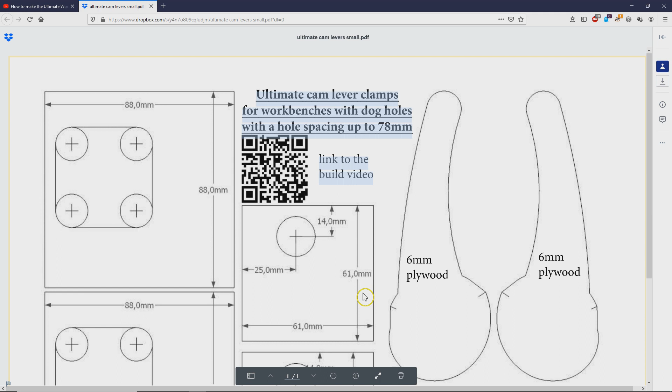I think it affects how low profile the blocks are, so at some point maybe I'll remake them with thinner plywood. But with what's going on in the world today, I'm not going to the hardware store.

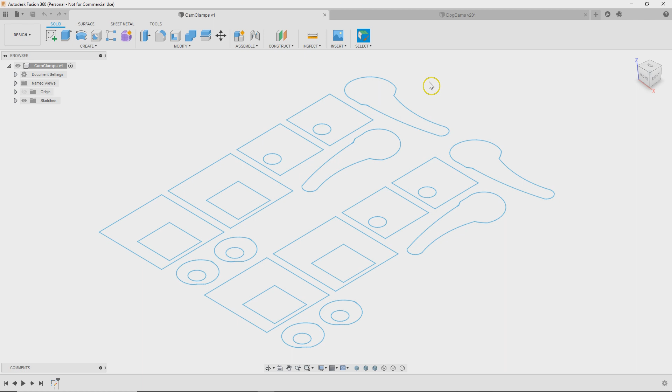So I took this DXF drawing and brought it into Fusion 360. This is basically the DXF drawing, and I imported it into my own sketch. I kept everything pretty much the same except the diameter of these circles.

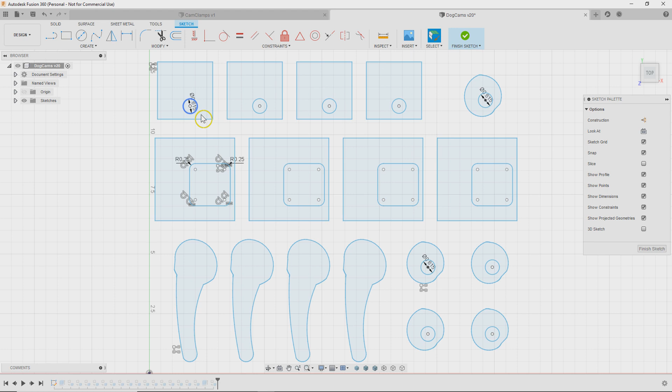Marius is using metric copper pipe, and I'm in North America, so I just changed it to the North American standard pipe for half-inch pipe. I kept everything else the same, and then I extruded these parts up 12mm. So that's basically what this is.

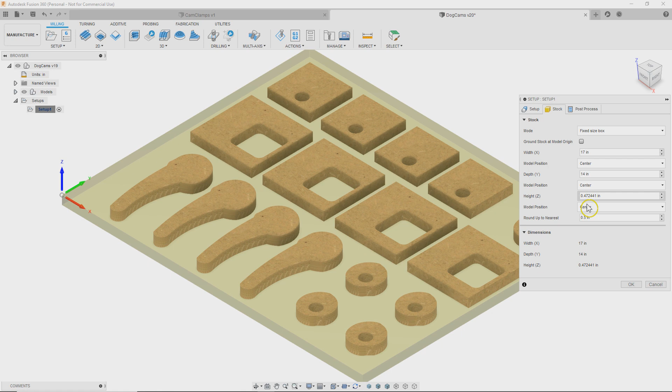I was basically about to go back into CAM, which is the manufacturer side where you make tool paths. I've done a little setup where I set up this piece of stock, the light green block. It's 17 by 14 inches wide, and this Z is 12mm converted into inches. I have a big sheet of this. I don't know if I'll cut it beforehand, but nevertheless, this is the setup for the toolpath.

So I was basically about to add the 2D contour to cut things out. Let's do that. I'm going to select the levers, and then it asks you to select a tool.

I'm going to select a tool, and this is your tool management window. I've created a library of the various bits I own and put them in here. The one we're using for this is a 1/4 inch spiral down cut, and in this dialog you basically enter in all the data for your particular bit.

You enter the dimensions, whether it's a flat end mill, how many flutes it has, things like that. And importantly, the speeds and feeds. My bit didn't come well documented, so I went out to Amana Tool and looked up one of their bits that's very similar.

They have a 2-flute solid carbide spiral plunge bit, and mine's a 1/4 inch too, so I'm just going to borrow their specs and hope that it's good enough. We're going to be running at 18,000 RPM, and at a 1/4 inch, we're anywhere between 180 and 250 inches per minute.

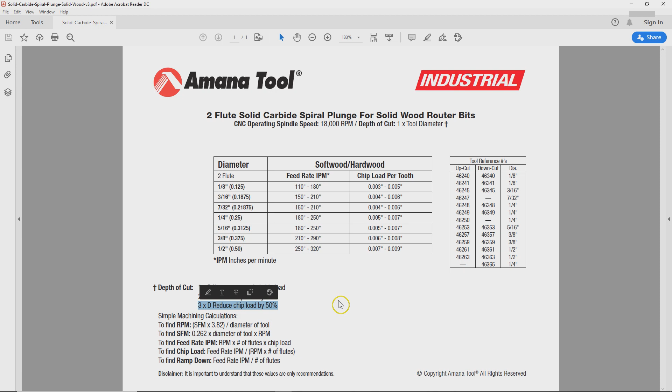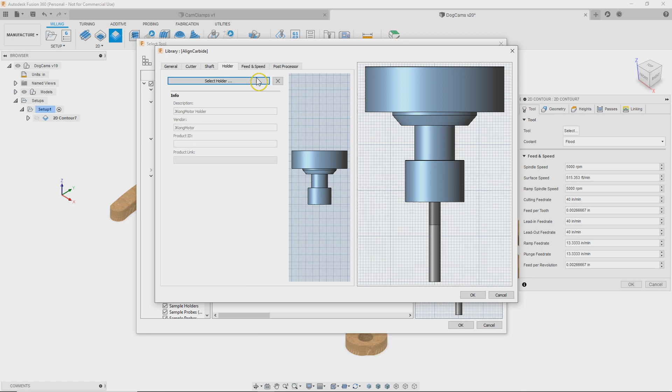Back to Fusion here, one of the other things I've done is model this J-Kong motor because that's my spindle, so I modeled the holder to match it. In Fusion, you can simulate a tool path, which is useful so you know if your holder ever collides with a piece of stock or a clamp or anything like that. I've modeled that here, so that's what I've specified the holder to be. That's kind of useful.

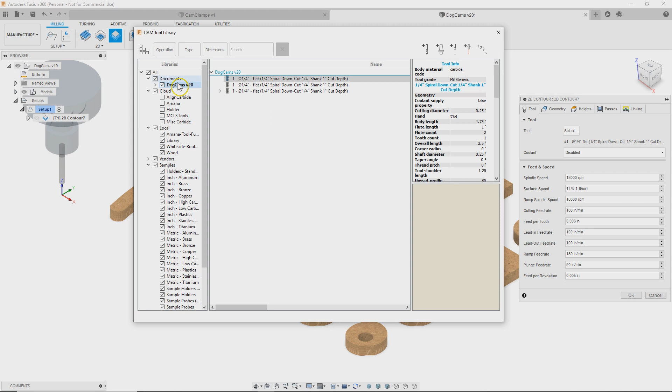So basically we'll be taking that, and just so you know, the speeds and feeds populated here come from the tool you just selected. But if you go to the tool library manage, what's actually happened is the tool has been copied from your library into the document itself. So now if you modify these, the bottom line is it's good to know you have a copy. I can modify the speeds and feeds or certain aspects of the cutter just in this document, or I can do it globally.

So moving on, we now have our contours selected. I need to go to passes, and basically what I want is multiple depths, because I don't want to cut this all at once.

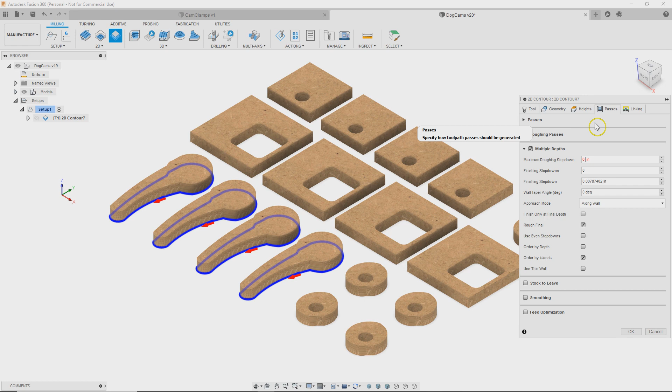I want to step down a little bit, and I'm going to say I'm looking for about 1/10 of an inch. We'll see what that gives us. So I'm going to click OK, and then it calculates the path.

You can see it actually decided to start the cutting on this third lever, which is fine, I guess I don't care. But more importantly, we now have four step downs.

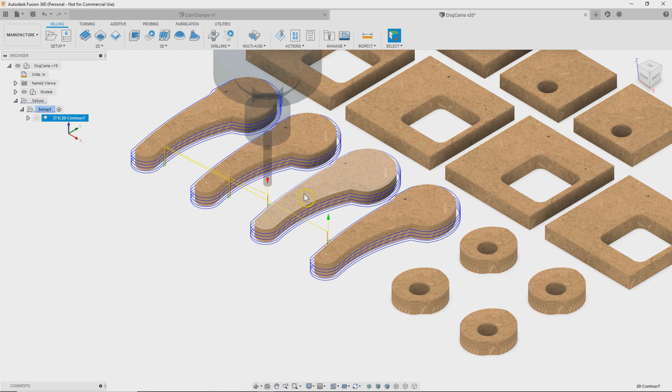What I also need, which I'll go back in to adjust, is some tabs. I don't want the bit to cut this piece completely free of the stock, because it's going to rattle around in there and probably get damaged or tossed. So I want some tabs.

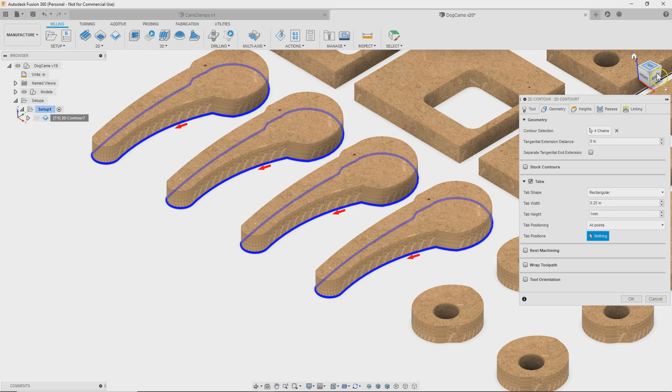So I want to select the tabs by points, and I'm going to say 1 millimeter tab height. Then I will just select some points here. Probably going to overdo it a little bit since I don't really know how critical this is. So, all right, that's pretty much that.

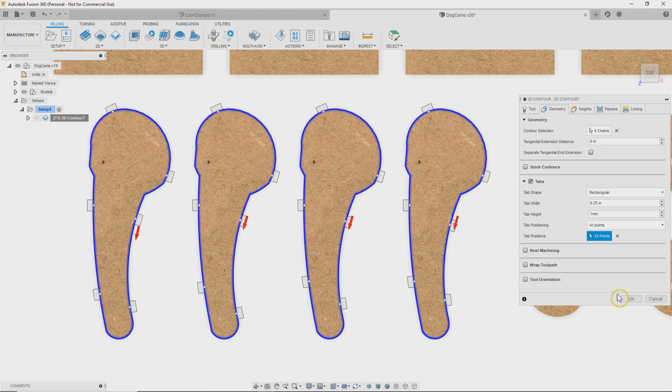So, number of tabs. Now let's see what it updates that path to be. So good, you can see that it's leaving these little tabs basically.

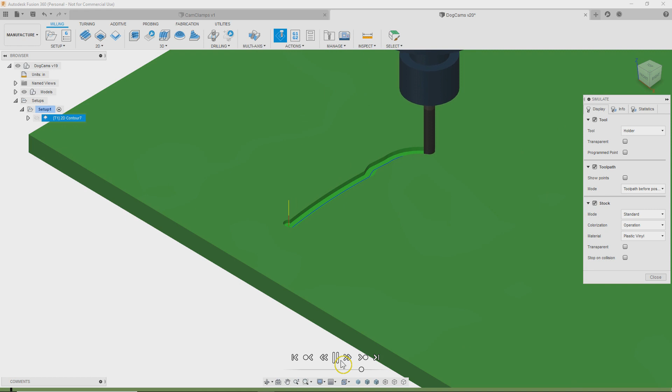So now if we animate or simulate this, you can either do it with the stock on or off. Let's do it with it on, and then you can see the path it's going to take. It seems to leave a little notch there to go down, which is good.

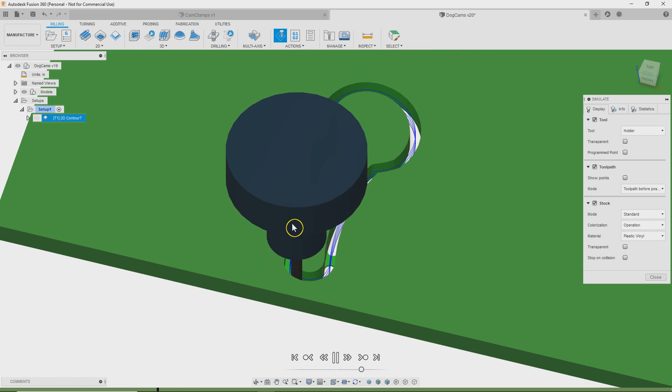I probably could be a lot more aggressive with this cut, but we'll see how this goes. It's cool, and those are the tabs that are left. So that looks pretty good to me. Let's zoom out, it'll go faster.

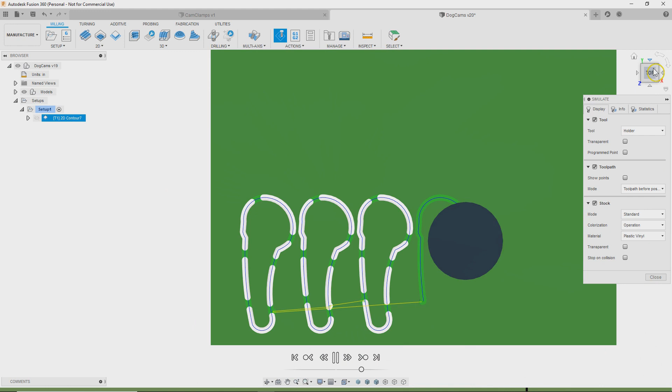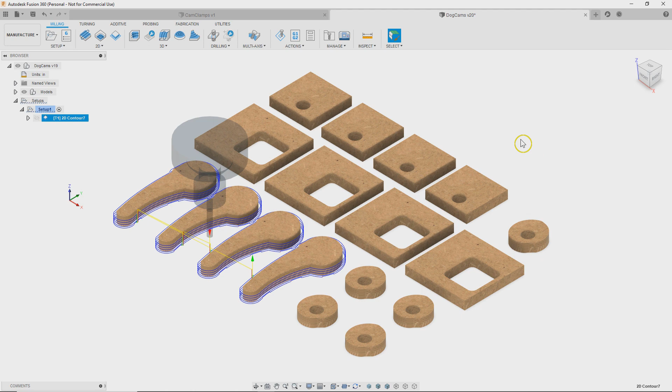All right, okay, so I'm pretty happy with that. I won't bore you with the rest of it, but basically I'm going to go make paths for everything else on here, and then I guess we'll go out to the machine and probably cut air for a good long time until we're satisfied, and then we'll let it loose and do the real cutting.

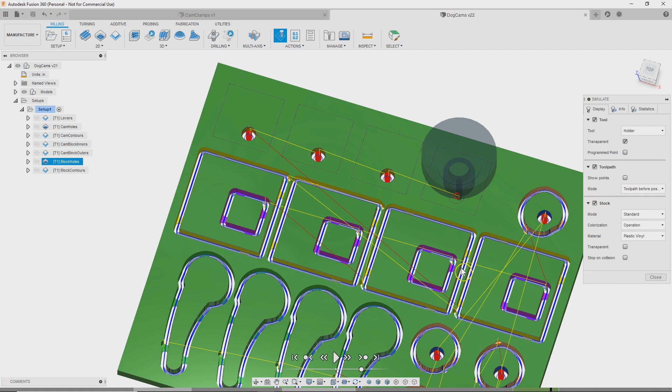If I cut the perimeter first, then when I went to cut the hole, I might tear the larger piece free from its tabs, and so I wanted to cut these inners first. So that's just something I did. I'm kind of happy with the simulation, so I think I'm gonna basically

turn these into G-code files and take them out to the machine. So here's the bit we'll be using today. It's a 1/2 inch solid carbide spiral bit, down cut. We'll see how it goes.

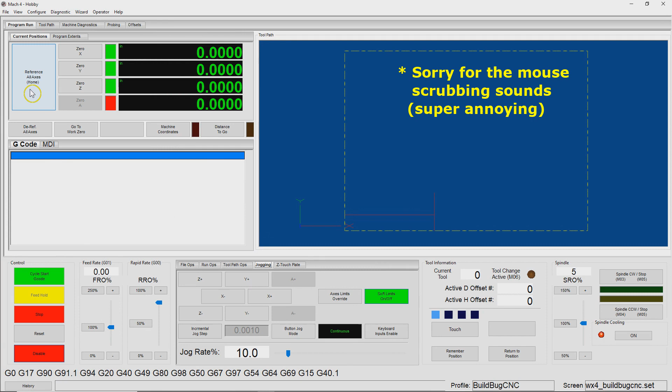When I come into Mach 4 on the machine, the first thing I do is I enable the machine, and then I reference all axes home. And I'm sort of hovering above my e-stop button just in case the machine doesn't stop.

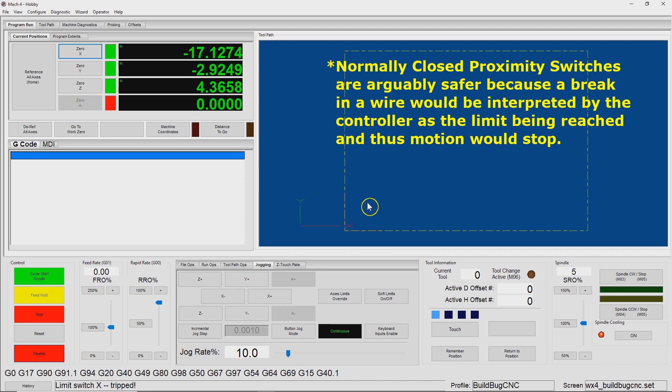You kind of have to know the limitations of your machine. In my particular case, my proximity sensors are my limit switches, and they're also normally open switches, so it's slightly less safe. I could theoretically have a bad connection in there and not know about it, and then when I approach my limit switches, they don't fire, and thus my machine won't stop.

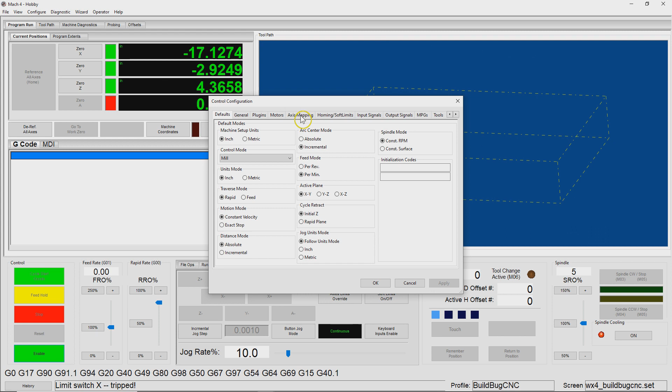So the good thing is that I've set up soft limits, and as you can see maybe here on the screen, this dotted line box is essentially my soft limits of my machine.

So if I disable the machine and go to configure control, in the homing soft limits, I've set up basically some soft limits. I've enabled them by the check mark, and then you can see there's some figures in there that essentially set up this bounding box. And so that will now limit my machine.

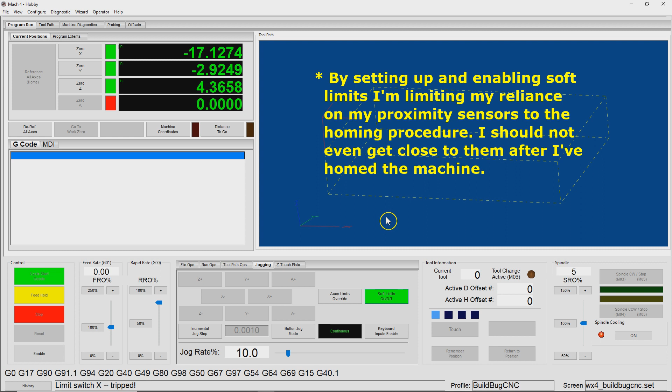So from this point forward, I will never even get close to my limit switches as long as I've enabled them. For example, here in the file ops or in the jogging, I have the soft limits on, and that will prevent me from ever approaching those limit switches. It's just an added layer of safety, and I've already encountered times where it saved me.

Anyway, so now that we see that, these are the work coordinates of the machine, and if we click on machine coordinates, we'll see since we just homed, we're at the homing location. So the machine coordinates are 0, 0, 0. And the work coordinates are somewhere else.

So anyway, now we're going to enable and jog back over to then use our touch plate to find the corner of this workpiece. So I'm just jogging down.

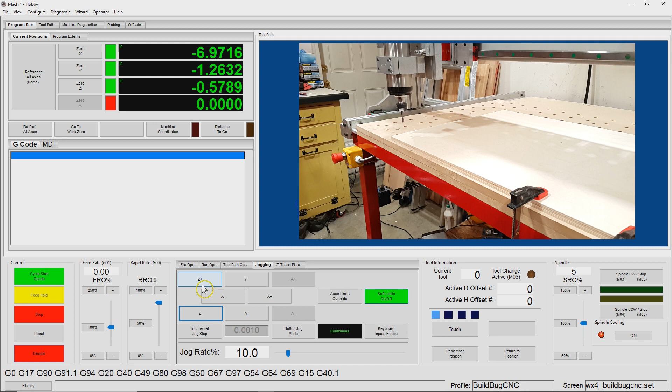Good enough. So one of the things I always do is test my touch plate to make sure that it's working. And so it's working. Now I'm going to put it in place here.

And then we are going to jog a little. And then we're going to find the corner of that workpiece, basically.

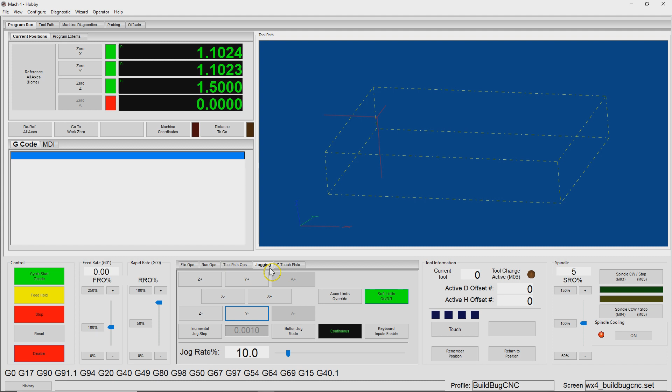All right, and so once I click OK, you'll see the work coordinates change from what they are now to what these are. And so that has essentially changed the work coordinates of the machine. So here are the machine coordinates and the work coordinates. And so it's basically your two reference points.

All right, and so now we know where the corner of that piece is. We don't need this anymore. The next thing we're going to do is to open the G-code file. And so these are the levers we just created.

And so what I'm going to do is come here to the feed rate. There's this feed rate section, which is G01, and then this is G00. So this controls how fast the machine is going to run when you cut and when you're not cutting. And so I'm going to drive these down to 0 so I can sort of cut air and control things really well.

And then I'm going to go to View, Fixture Offsets. And then for Z, I'm going to add 1 inch. And so this means that we're going to add this work shift so that every piece of G-code that comes in interpreted here, this instance is going to add 1 inch to it in the Z direction. And so that's going to basically let us cut air.

And so here you can see in the G-code that we come down, and then here we're turning on the spindle. And I'm going to quickly turn off the spindle so that we're just using this dial up over here so that we don't have to deal with that.

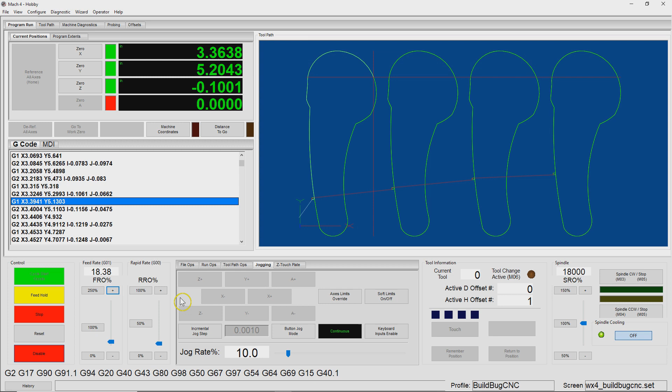And so over in this window, these red crosshairs are telling you where the bit is in the toolpath. Obviously you can hear it makes quite interesting sounds when it goes slow.

And so I'm feeling pretty confident about that, so I'm going to just pump this up a little bit more. Cool. And so we've come to the end of that feed rate, and now it wants to do a rapid. So I'm going to take this to 0 and then go up on the rapid.

Okay, and so it basically retracted again and then went down. So that was somewhat unexpected by me.

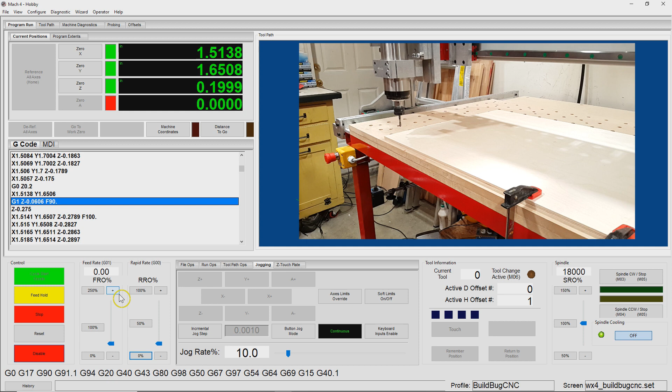Alright, so that feed is done. So let's do the rapid again. I'm pretty sure in the configuration of Fusion you could tell it not to do this retraction, so maybe that's for future.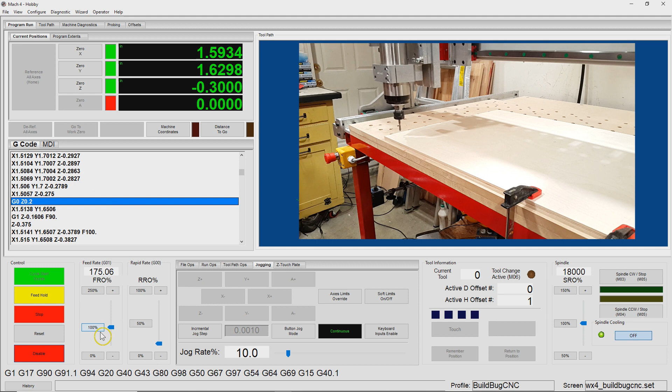So basically that's 100% speed right there, so that'll be interesting to see. So let's do one more round.

There you can see it's doing those tabs. Now it's moving on to the next one. You can see we're over in the second lever now.

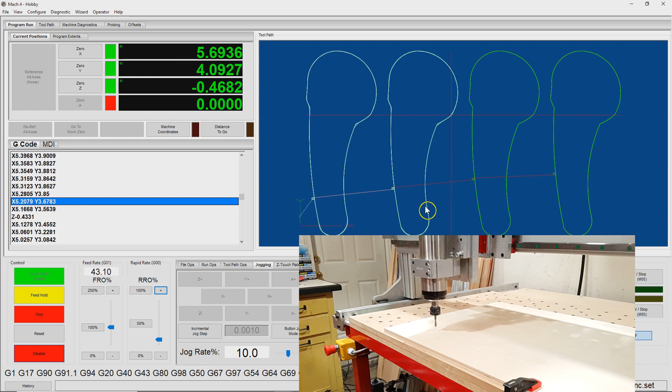So anyway, I'm not going to bore you with going through this, but that's basically the process that I've been using. So I cut air for a while until I'm confident, and then we do it for real.

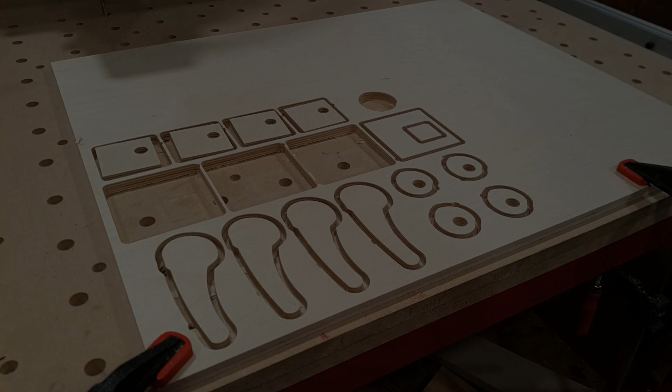All right, well, that's pretty much it. I think other than maybe the failure of these tabs in a couple different places, it's not too bad. I also seem to nick into my spoilboard a little bit. So at this point I still haven't surfaced it, so I guess I get what I get. Anyway, not too bad. Thanks for watching.